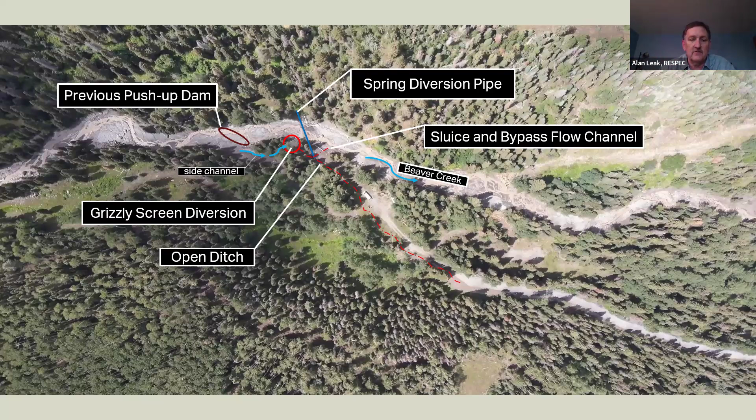The August 2021 event was characterized by cycles of what I call aggradation and degradation in a dynamic geomorphic system. The initial erosion and degradation occurred during the high flows of the event. Then as the flow subsided, you started to get the deposition of small boulders, cobbles, and fine sediments in the receding limb of the event itself.

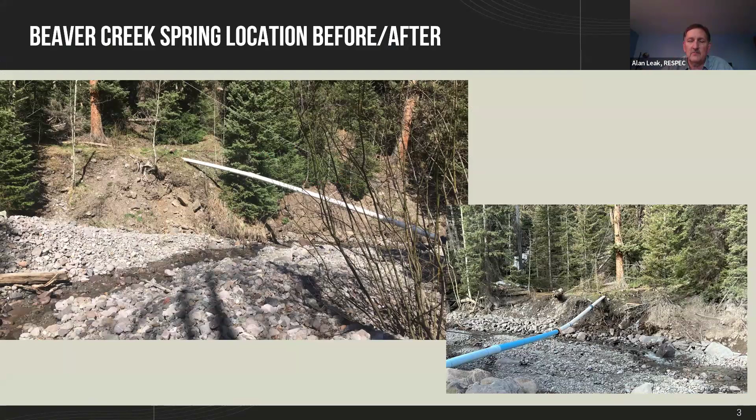The diversion channel and the structure was filled with 3 to 4 feet of material, while the adjacent channel degraded about 3 or 4 feet. So this is the adjacent channel that you're seeing here before and after. And although the scale doesn't really show it, this channel over on the right-hand side is about 3 or 4 foot lower than it was historically.

This is a view looking downstream from where the push-up dam was. On your left-hand side is the main channel of Beaver Creek. On the right-hand side was the diversion channel or side channel that took flow over to the grizzly structure itself. And the picture on the right is just an example of the bank erosion that occurred during the event itself.

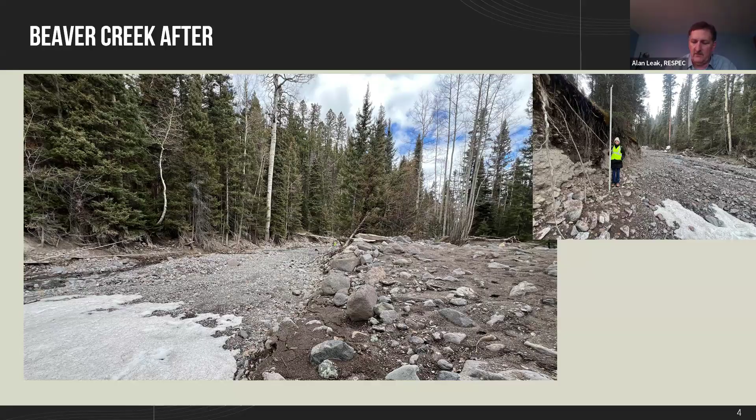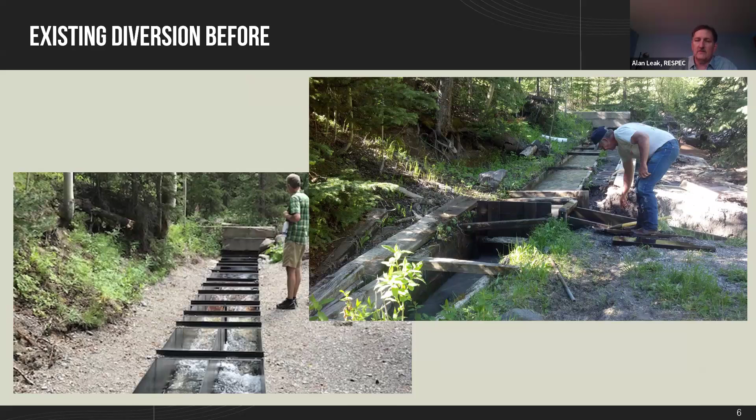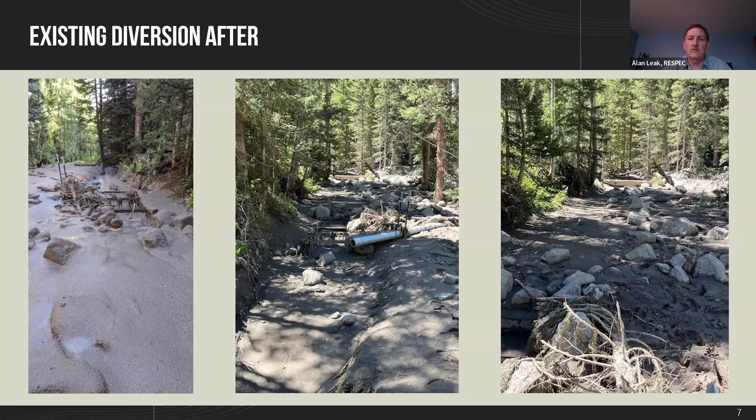You know, we don't yet have an estimated frequency of the event, but likely believe that it was larger than a 100-year event and was bulked with sediments, which can double the amount of flow or size of flow that the channel would have seen itself.

So for the alternatives analysis, we looked at a lot of different locations and kind of came down to 3 possible locations. One is the one up on top, with north being to the top, which is where the existing grizzly diversion structure was. 2, we looked at about 200 feet upstream, which is about where the push-up dam was located to divert water over into the side channel. We also looked at it about 800 feet upstream, all looking to try to figure out what would be the most stable and best location for a future diversion structure.

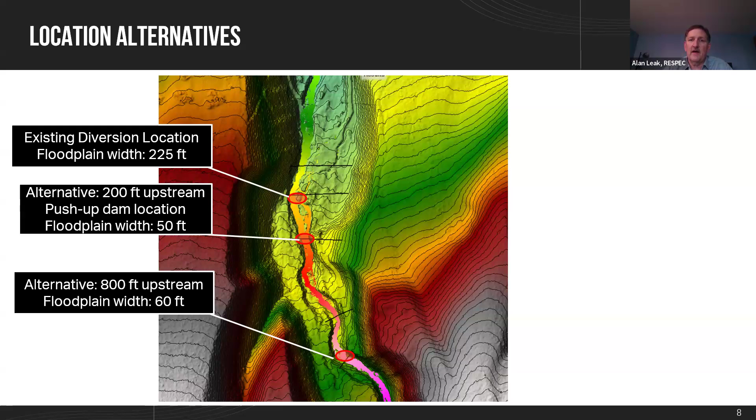And really what's most important to select a site is one that has the most relative stability and control while meeting the project objectives. So I'm going to go through a couple of the alternatives that we really focused on. The one 800 feet upstream, although it is a more stable channel section, did not meet the other project goals from a water rights standpoint, from a total disturbance standpoint of trying to build something that far upstream. And so we really focused on the 2 downstream locations. The first one would be trying to put it back in the same location.

And again, these are just concept plans that we use to help develop some conceptual cost estimates. In this case, we'd be working on a structure to try to divert up to 10 CFS over into the side channel itself. But higher flows than that, we really don't want to go into the side channel. We'd want to try and maintain those in the main stream itself. So this kind of boulder push-up dam with high flow bypass is what we had conceptually looked at.

We're going to have to stabilize the bank of that side channel itself. We could either remove and replace the grizzly with a larger structure or a different type of intake, but then tie back into the existing facilities that are there, assuming that we can get them cleaned out and everything tied back together. So some of the pros of that is we can use the existing steel sluice structure there. It has similar operation and maintenance as the previous design. It's probably the easiest to get access to and has the smallest area or footprint of impact.

The cons are the most flows directed toward the secondary channel, which is not armored, but it's very difficult to armor for those flows. So really what we want to do is to divert only 10 CFS over there and let the rest go down the main channel. That is a very difficult structure to try to design. And I'm going to go back here. If you think about it, we're trying to take 10 CFS around the main channel and have the rest of the flow go down the main channel.

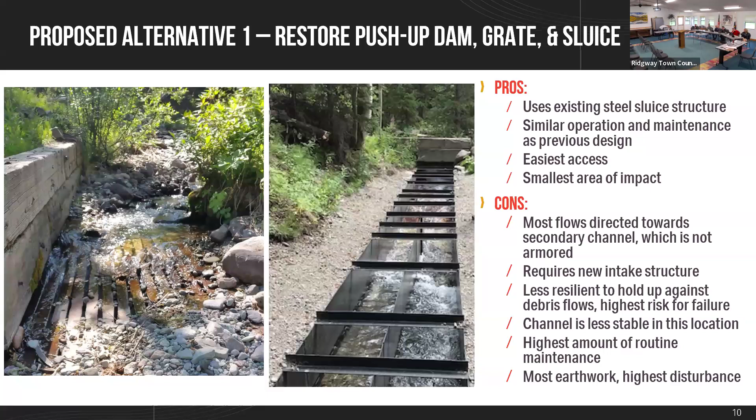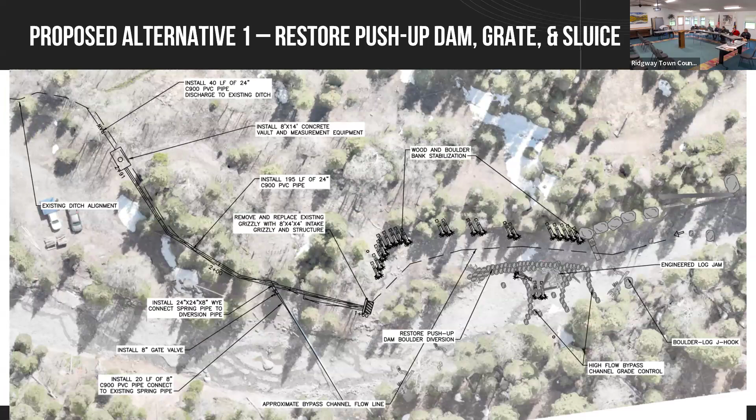It would require, yes. I think somebody had a question on alternative one. All right. Yes, please ask. Actually, it applies to all of them. Just a quick question. What is the typical CFS in the main channel under normal conditions? So it varies between 1 CFS in the winter and early spring or late fall, up to, depending on what type of storm events, this channel can be carrying 20, 30, 40 CFS of flow. So at most you'd be diverting 25% of it under high conditions. Correct, except in a real large storm event. Thank you. Yes. Thanks, Michelle.

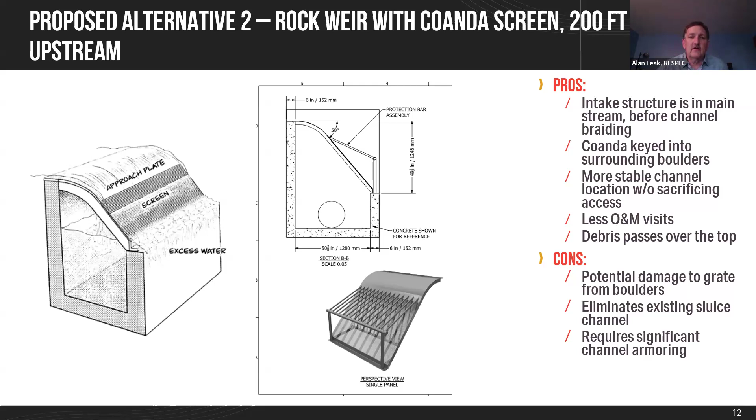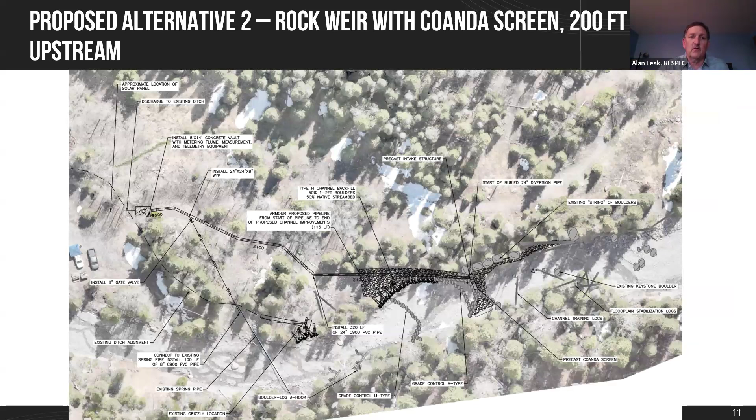There are some risks, potential damage to the grate from boulders. We can reinforce it as shown on this drawing, but there's always that risk that would damage the screen and it would have to be replaced. If we went with the alignment that we're showing on this figure, we'd be going away from the sluice channel. But certainly as we move forward with design, we can relook at it and say, can we bring it through the existing sluice location? It does require some significant channel armoring, as we've shown here. I believe this armoring is going to be similar for both alternatives. No matter which one we do, we still have to do some bank armoring, both upstream and downstream of the structure.

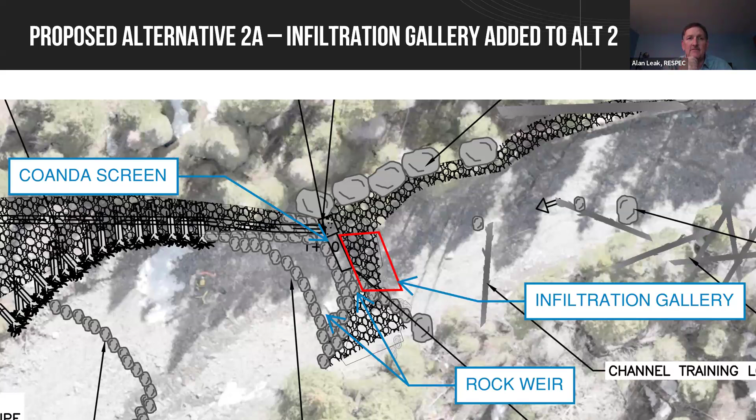The other thing that we put in there is a possible alternative add-on, and this could be on either structure, and this would be an infiltration gallery. We're just showing it here, added into alternative 2, where this would be a facility buried in the channel. So it would pick up any flows coming through the alluvium, the sands and gravels and boulders in the channel itself. The two key things for that are, one, it would definitely be able to divert that flow in the winter if the town so desired.

Two is that we are unsure of exactly how much underflow there is in the existing channel. It appears that the surface flow is staying on the surface, but we won't actually know that until we dig into the alluvium and see how much subsurface flow there might be. And the concern is that some of the armoring in the channel that exists right now, as the channel tries to restore itself to prior to the debris flow conditions, may actually open up some voids and allow more surface flow into the underflow. And thus, you could have 1 or 2 CFS of surface flow that all of a sudden disappears into the alluvium, and you would not be able to divert it in a surface diversion structure.

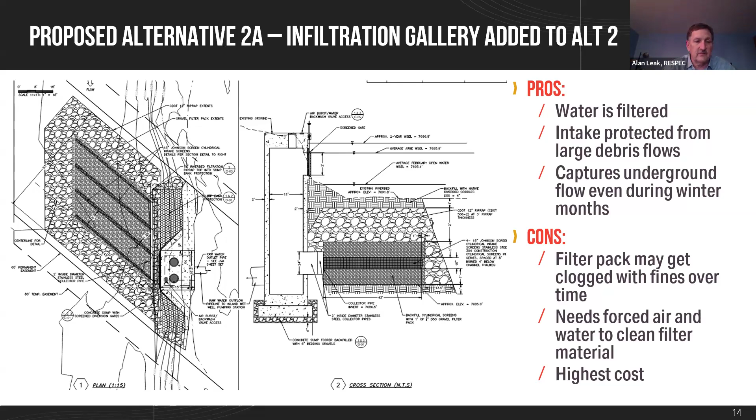So I think the key thing is that we've recommended the site 200 feet upstream from the existing diversion location based on several factors. We have a reduced risk of head cut impacts. I think in the report I mentioned that there is a head cut that's heading upstream. The amount and timing of how far the head cut moves up before it's buried again with another flow is unknown, but this structure would be a little bit further upstream than the alternative 1 structure.

It's naturally confined with natural confinement controls, and that's really important in being able to maintain a structure in this type of stream. The 3 other aspects that are critical to this project, though it does apply to alternative 1, is there wouldn't be a change in point of diversion required per the Division 4 water engineer. It has minimal environmental permitting risks, same as alternative 1, and minimal impact to the land as much as we can minimize.

I will mention that we did take a look at different alternatives for diversion structures. We want to make sure that the diversion structure could divert a range of flows, from 0 to what was determined to be 10 CFS as the rate for design. We think this reduces overall maintenance. It's probably one of the most natural looking in overall appearance if you start looking at concrete structures, for example. And we think it has the minimum impacts of construction on the landowner, in other words, on the access road itself and getting materials up there. And it provides us the ability to massage the design as we move forward in the process.

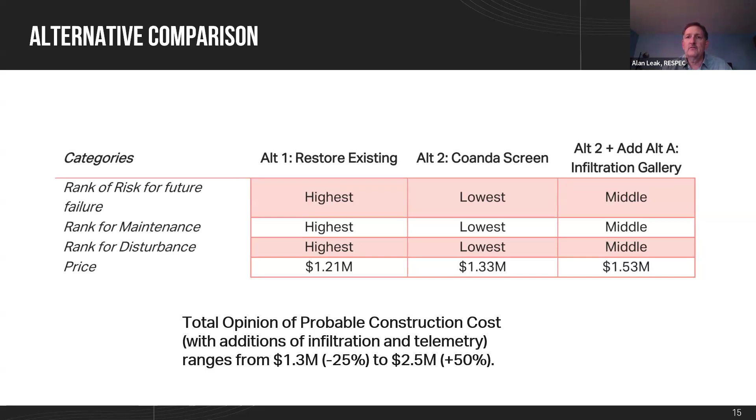So that's what I have to present. I'd be happy to open this back up for questions and answers. I will stop sharing, but if I need to share back a slide, I will certainly do that. Great, thanks, Alan. Questions?

I have a question. On the need to divert in the winter, if we don't divert in the winter, are we just relying on Happy Hollow ditch and the lake? Is that our only source during the winter? Yeah, in the winter months, it depends on the winter, but if the ditch freezes over, sometimes there's a little bit of flow. Joanne can answer this better than I can, a little bit of flow makes it to the lake, but we don't divert from the lake in the winter. We rely on the Happy Hollow water. Is that a pretty stable reliance?

In the winter months, yes, it meets the needs. But is there no risk of him pulling our access to the Happy Hollow? In other words, do we need to build in a backup for the next 20, 30 years by engineering for diversion in the winter? Certainly could. The LRE report talks about trying to divert water and getting it into the lake in the winter as a way to maximize or optimize our use of our water.